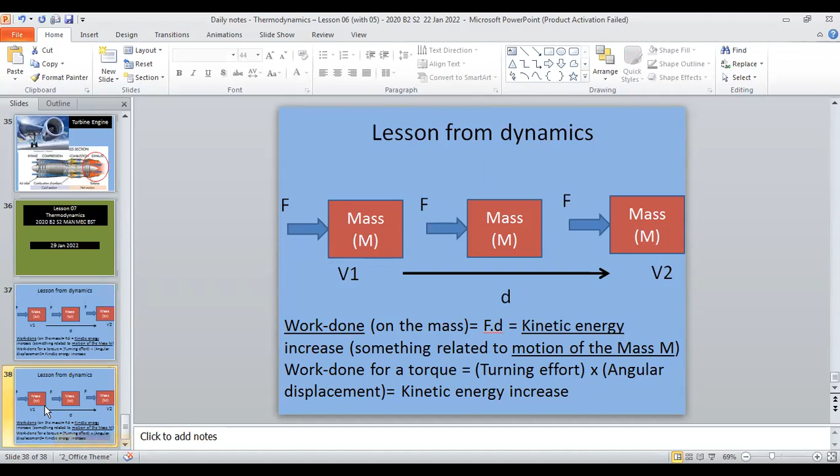So I'm starting from a previous slide here. But I'm looking in a different way. So here work done on the mass, F times D. Now let's say, if we think not on the force, but on the mass, I'm rewriting this. Work received by the mass. Of course, work done, received by the mass. Think that from the mass side, work received by the mass, F times D. So the result is kinetic energy increase.

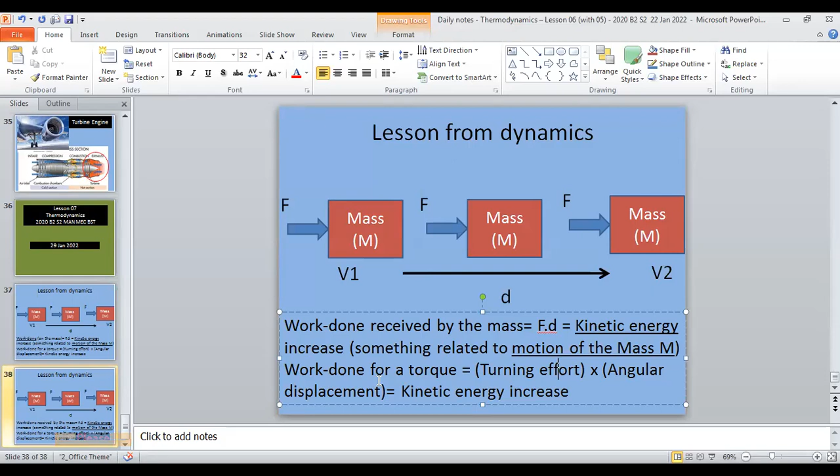So work done. When the mass receives the work done, it happens to be F times D, the force on the mass times the displacement of the mass. Of course, in dynamics, force and displacement all are vectors. This is the simplest way I'm explaining. So when mass receives a work done because of an influence of a force, the mass is displaced. Not only that, the important part is the mass receives a momentum change.

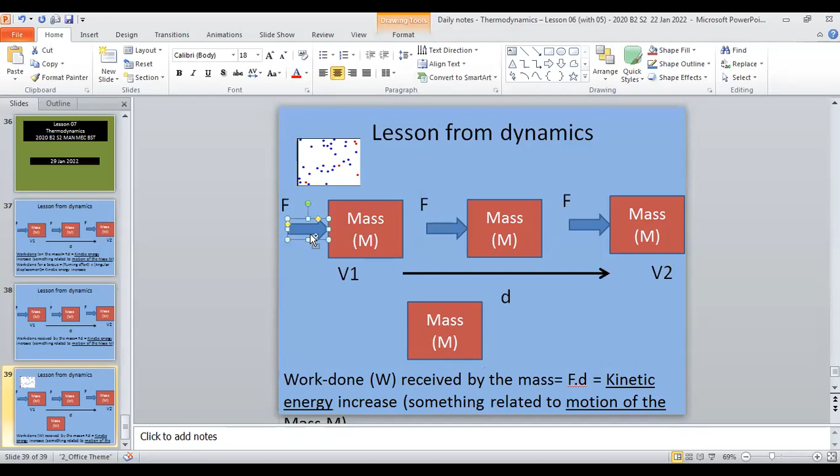Now my point is, the same way, instead of a work done received by this mass, I'm thinking of a gas quantity. Because with that force, finally, what it receives is a work. I will go for one more slide here. So this mass receives a work done, W. Force has a direction, displacement has a direction, but when it comes to work, this is receiving only. For work we don't consider a direction.

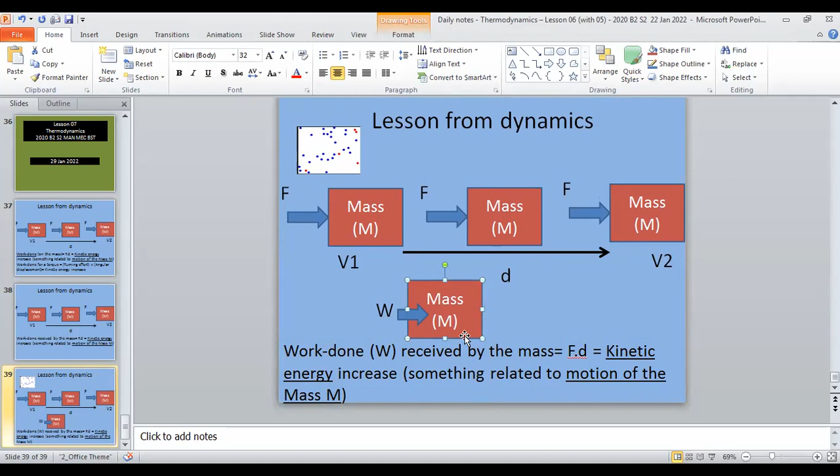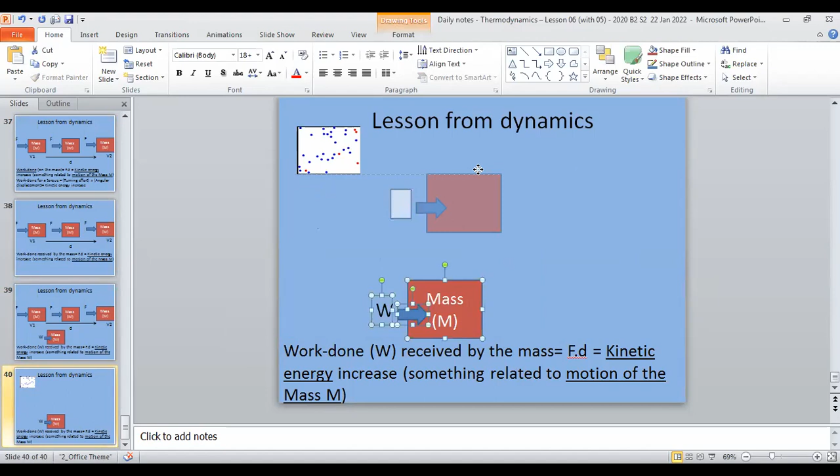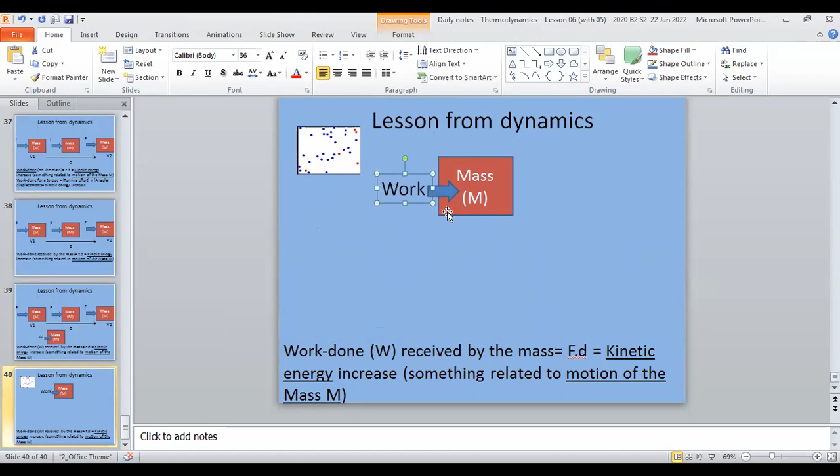I'm putting an arrow here because this work is being received by the mass. So as a result, there are a lot of changes, including displacement, increasing of velocities, change of momentum, even the kinetic energy level differences. Likewise, mass in dynamics, when it receives a work, you have a little understanding of the change on the mass. You have an idea.

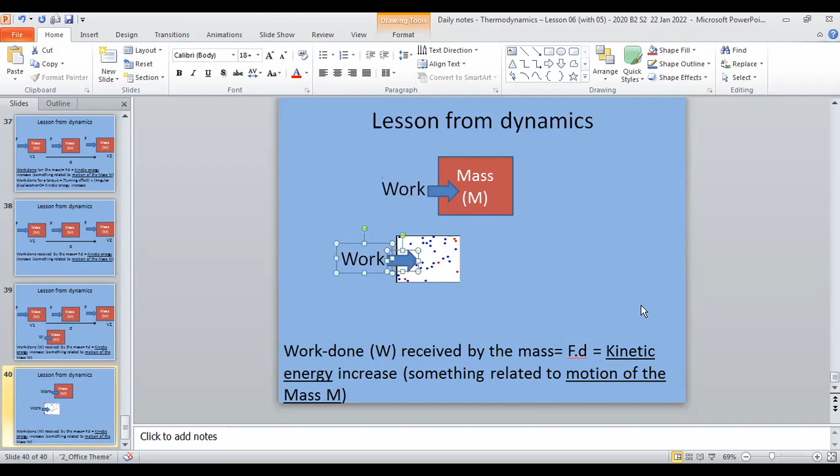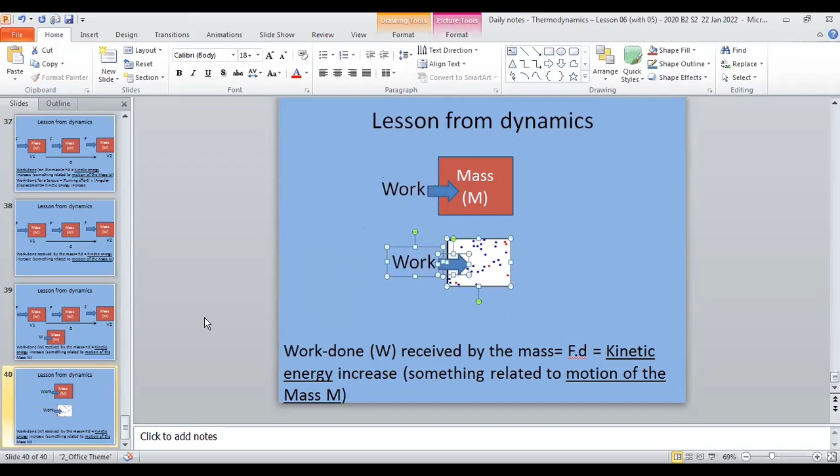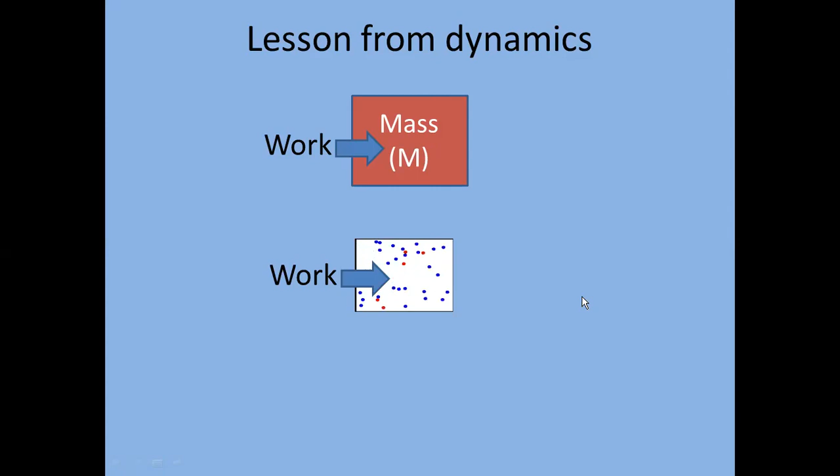When gas receives a work, a set of molecules are there, of course. When gas receives a work, as a result, what may happen? I think you know this, and we have discussed it. I'm not going to complicate your views on this, but I feel we should talk about this as well.

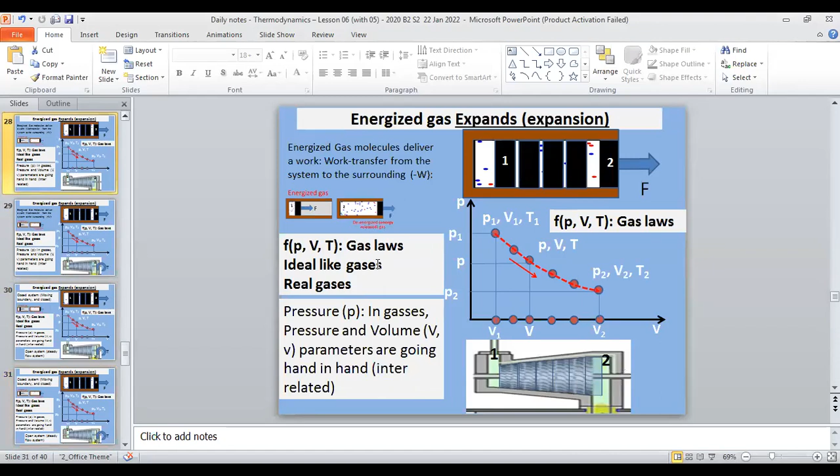So what happens is when this receives a work, it affects pressure and volume. PV changed. Pressure and volume changed when the gas entity received the work. So the PV change is the reflection of the response of this gas entity when it receives the work. The best example may be a piston cylinder mechanism. So let me take a piston cylinder mechanism.

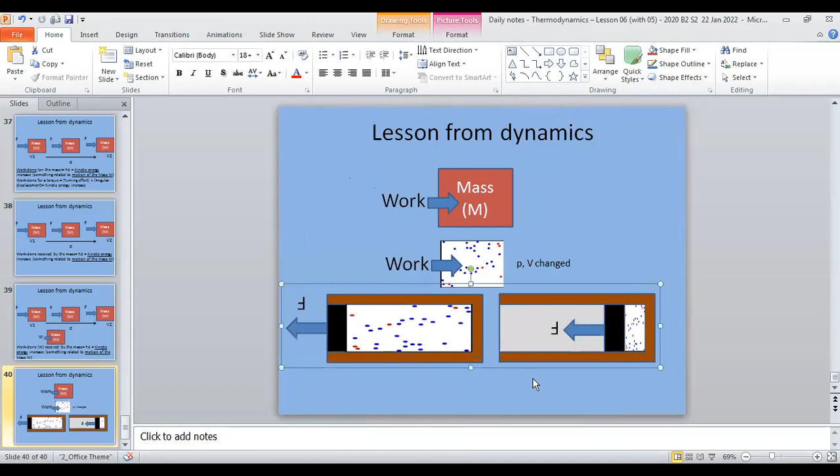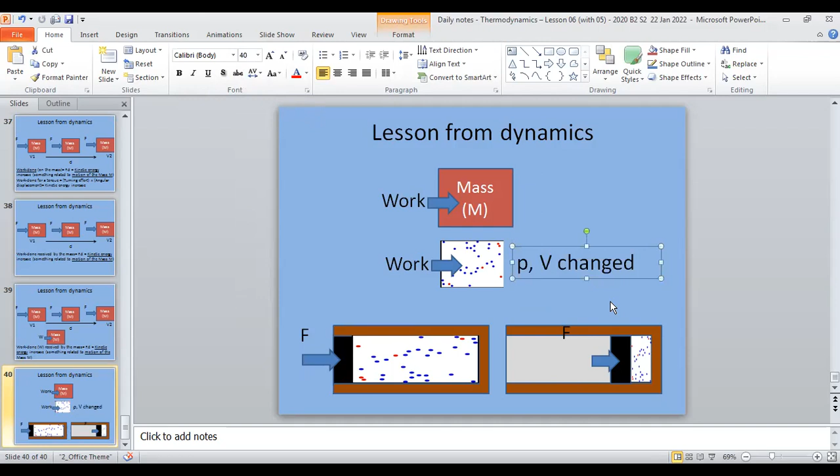Force. So instead of force, we would say this received a work. By means of applying a force on the piston, it receives a work. So this gas entity receives a work. So there is a change of P and V. Changing of PV is the possibility.

And so when force is applied, at this point, the work is fully received here. So work, put it here. Force has been applied, and there is a displacement of the piston. That's true, but this arrangement makes this work transfer to this gas or air entity. This is the work received by the gas or air entity.

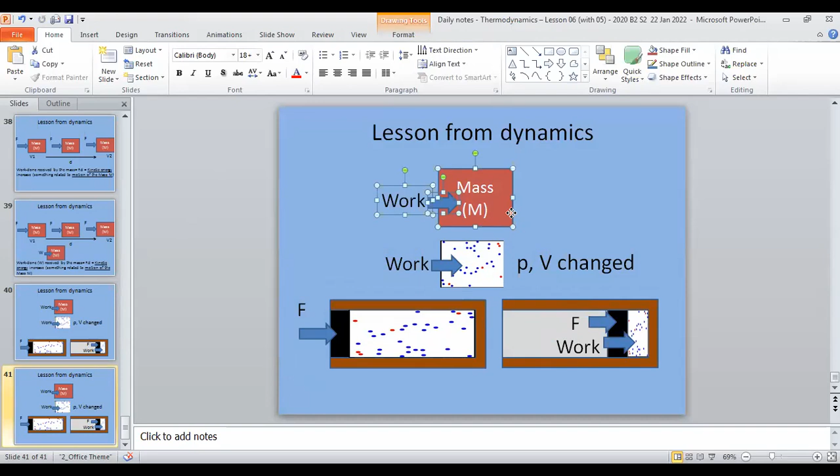So PV changed. Volume changed significantly, and even there could be pressure rising because of this work done. You can see the PV change. So when the gas delivers a work, it means it releases a work. Same thing, don't worry, but worth drilling this. Now you are thinking like a gas. Gas is receiving this.

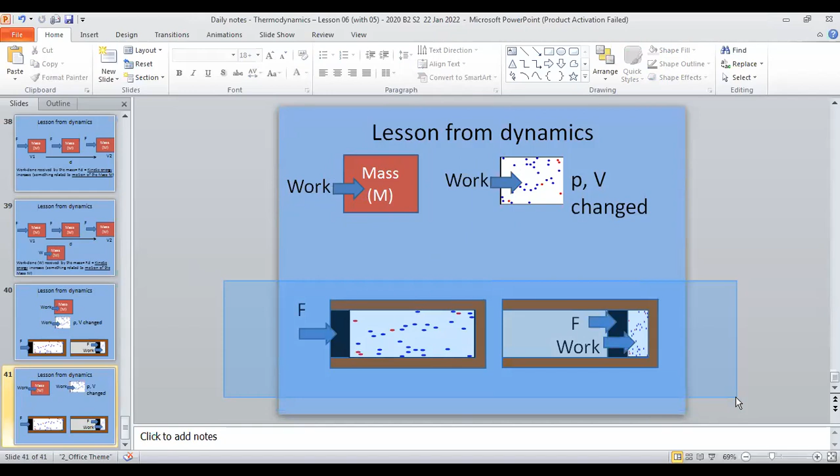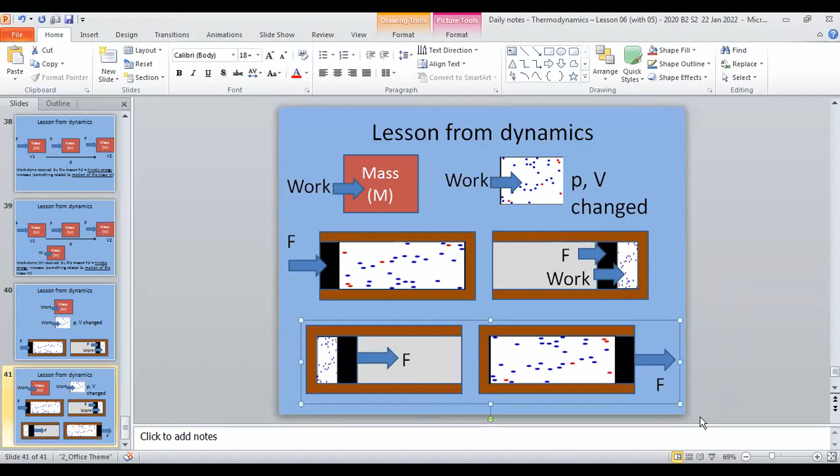Now it's different. Now it is different. Here, initially, it's pressurized in a smaller volume, but see, volume change, and because of this force, we can see the piston displaced with the force, so that this may do some work. Maybe when this pushes, there may be connecting rods and maybe cranks, so there may be some turning of flywheels, whatever, there can be a work done somehow because of this linear motion.

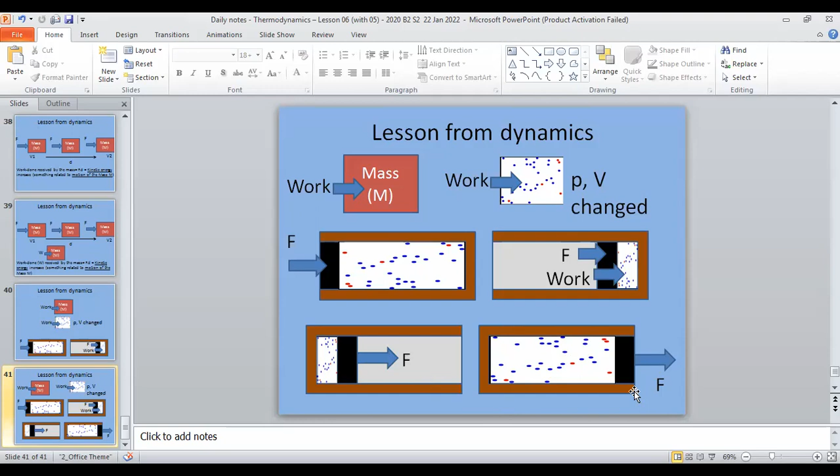So here what happens is, work. All released. Interesting. Okay. Work receiving, work releasing. Again, you can see the same. PV changed. Change of P and V. So that's a possibility. So when a gas entity is receiving a work or releasing a work, there is a change of P and V. Okay. So here releasing, here receiving.

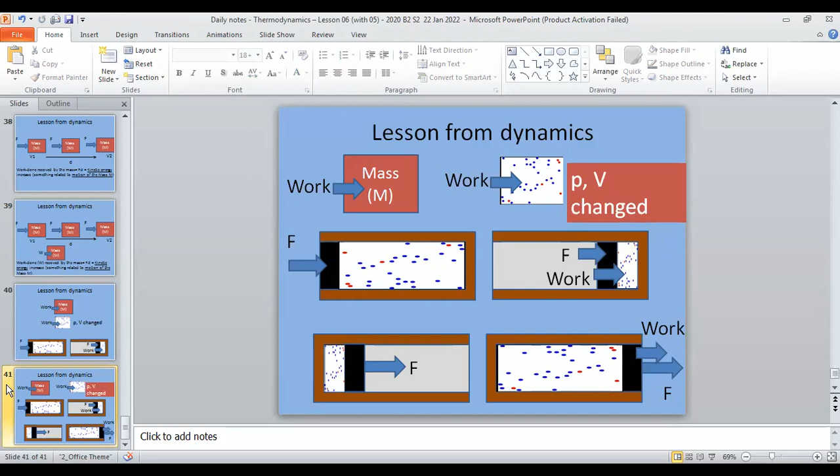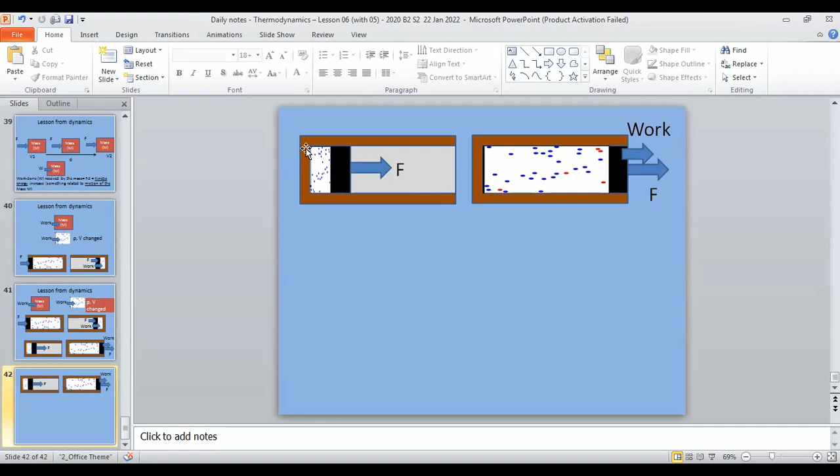Then in releasing of the work, you can see the volume increases, means the gas is expanding, we call it expansion. Prasarani in Sinhala we call it. Somehow there is an expansion of gas. So volume increase or expansion of gas entity is what we are observing when the gas entity performs work. It's quite simple.

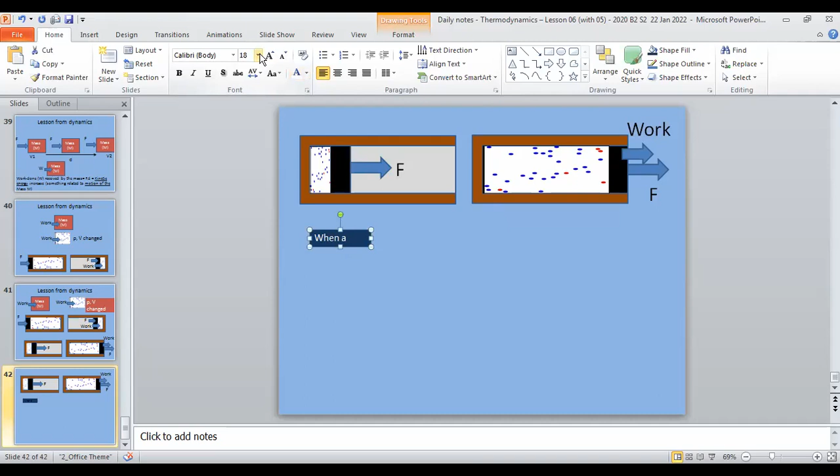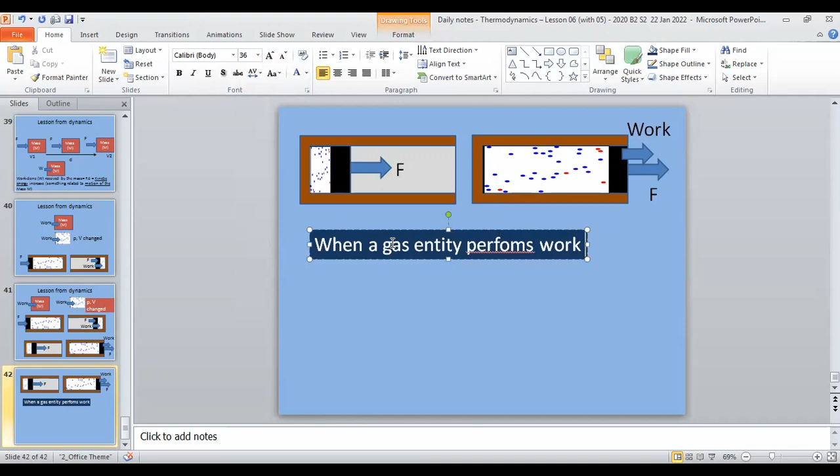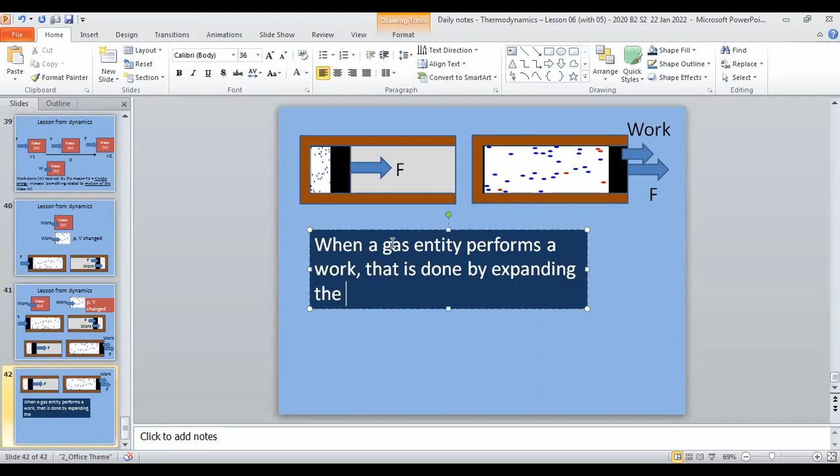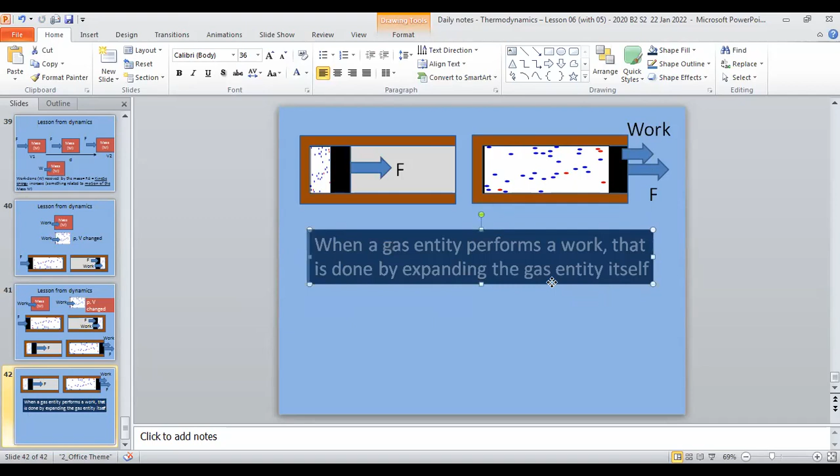When a gas entity performs work, that is done by expanding the gas entity itself. Okay. So gas entity itself expands and performs a work. Performs a work means delivers. Delivers or releases a work. Delivers is the best, or performs.

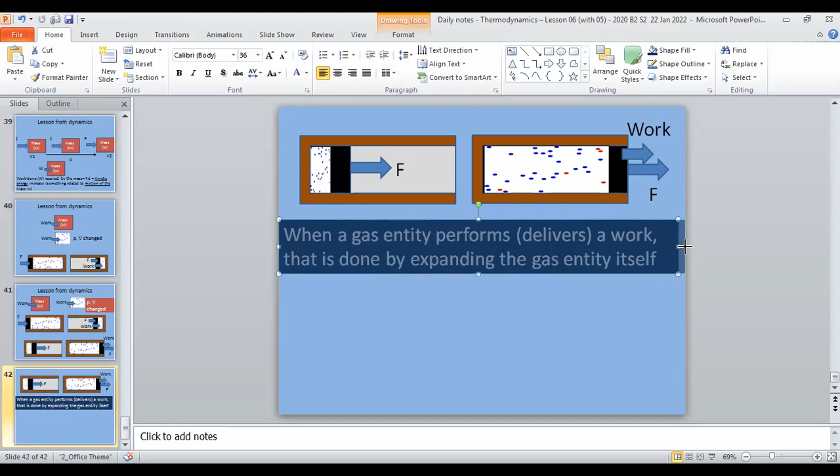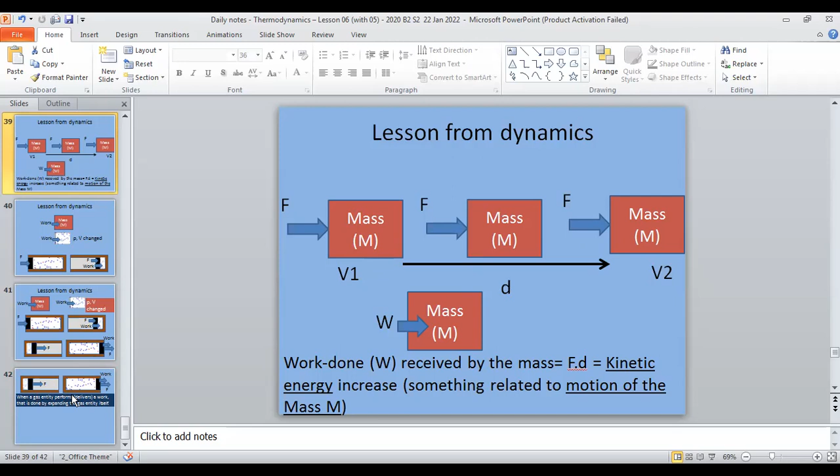Volume expands. Okay, so this is the obvious one. So you imagine the volume increase, but here when it receives, it is displaced. Still connected with the space, receives a work, but somehow here is displaced when it receives work. So we will come to receiving work afterward.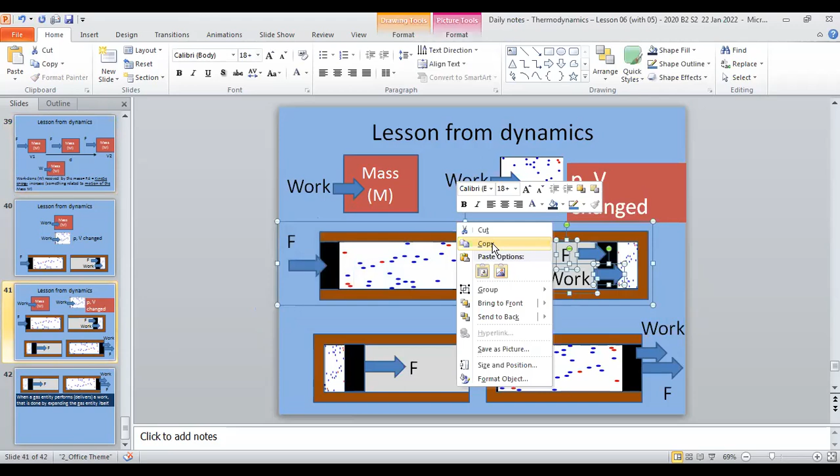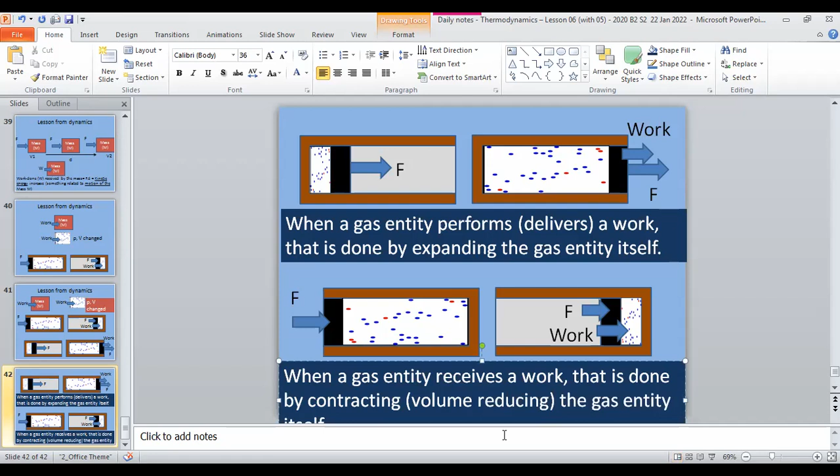Now see, when a gas entity receives a work, that is done by contracting, means volume reducing, contracting, or the volume shrinking. Let's say in general, because that's how they are receiving a work. So there is this contracting effect somehow. Interesting, eh?

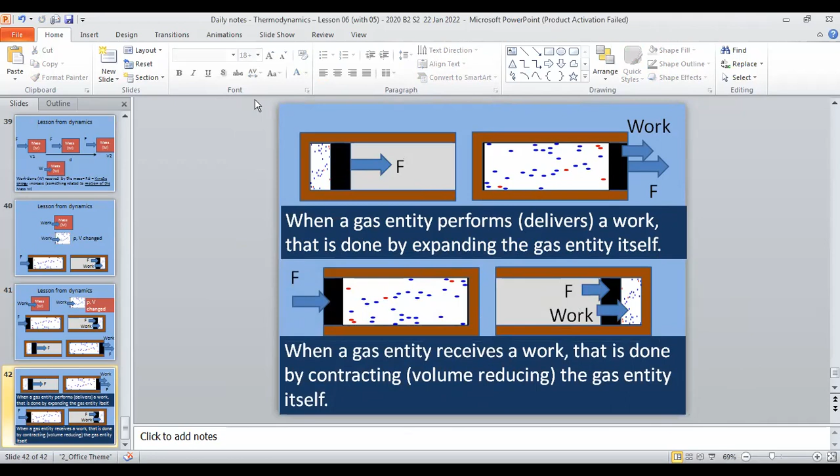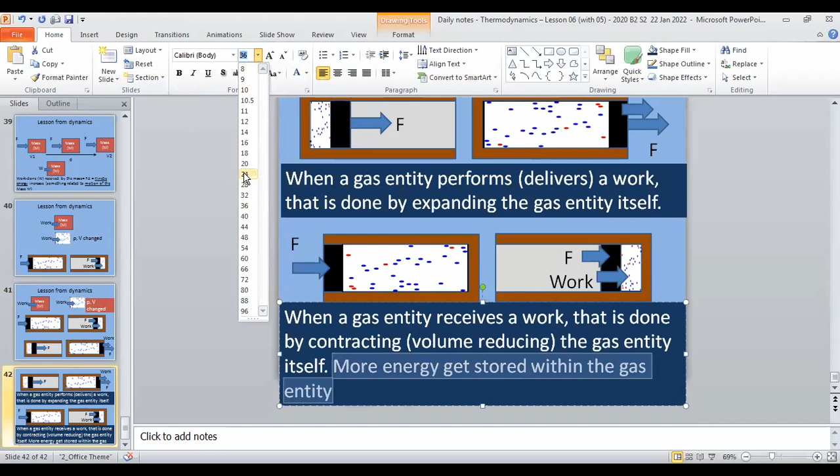So here, when it contracts, receiving work means more energy gets stored. More energy gets stored means energy level increases within the gas entity. Yes, this is what happens. More energy gets stored because it's a kind of energy input. It receives, so more energy gets stored because it has to be there if it received.

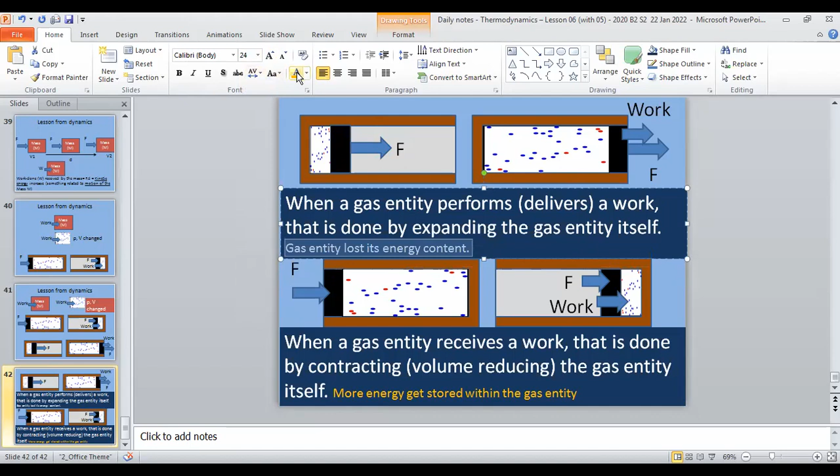And here, when this gas entity delivers a work, now the gas entity has reduced energy. It has lost its energy content. Not fully, somewhat lost, I would say equivalent to W. Here also equivalent to W.

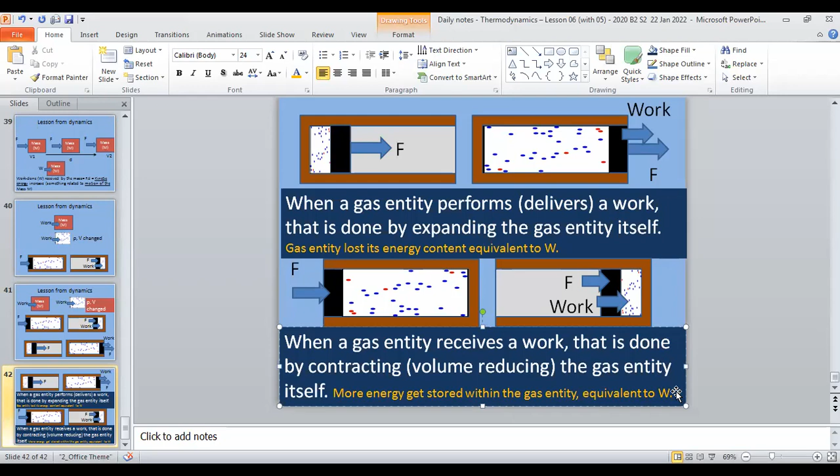Let's say no other heat interactions. So I put a question mark here. For some cases, if there are heat losses, it's a different case. So W received, correspondingly there is an energy rise. If heat is lost, there is a corresponding energy loss. It's a different story, but corresponding to W there is an energy rise. Delivery, there is an energy loss equivalent to W. I believe you can digest this easily.

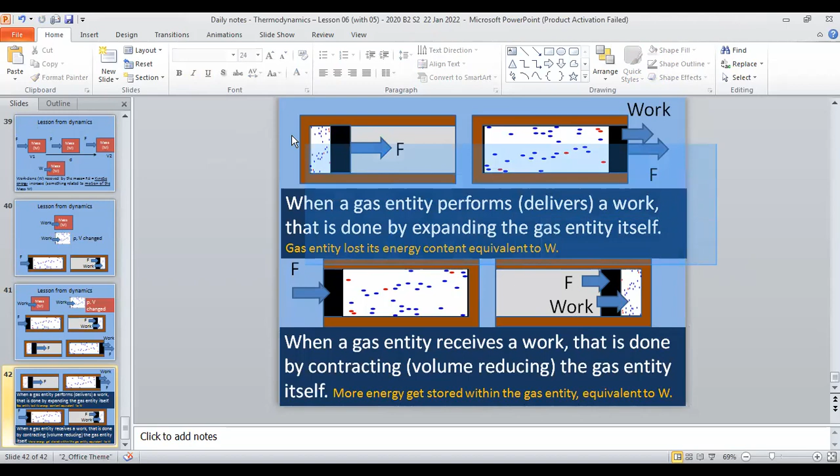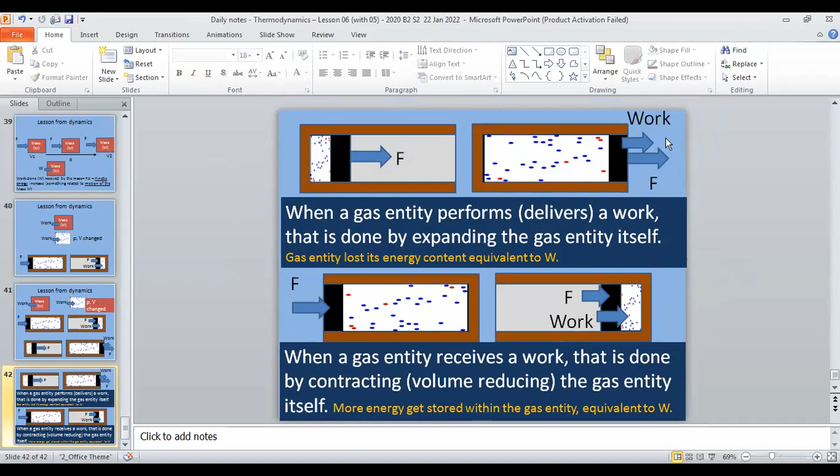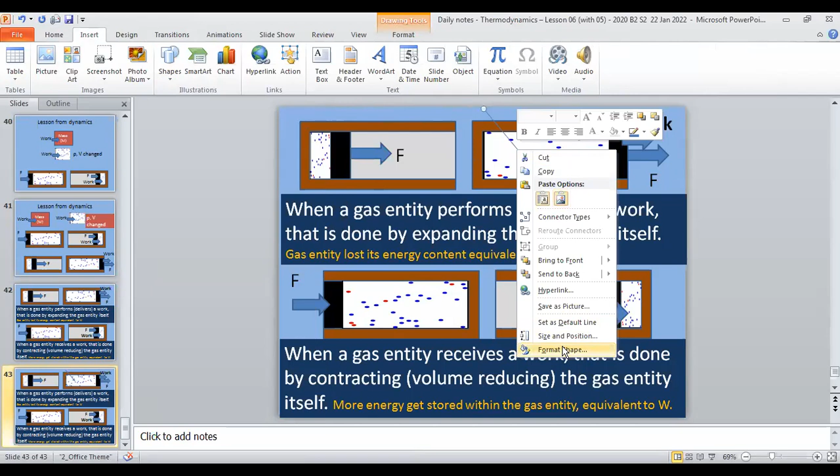Now, I'm taking the same. Let's say sometimes, while receiving this work, there can be gaining or losing of heat. See, receiving some energy in this expansion process, heat. Let's see, now what happens?

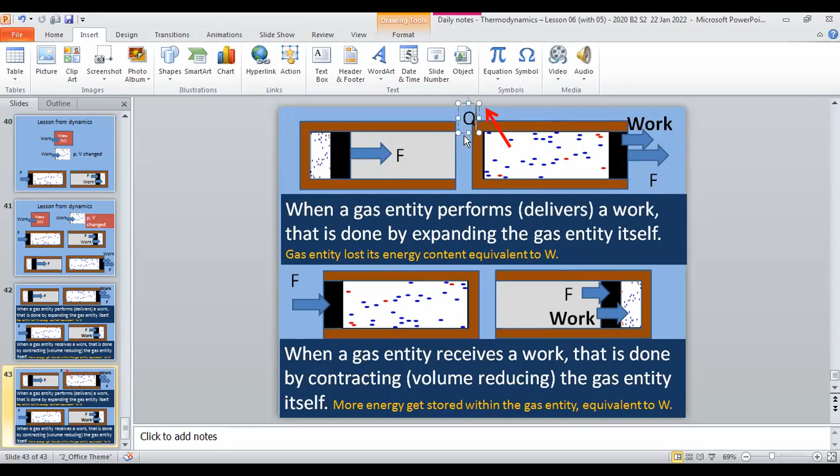Sometimes there can be receiving of energy. Sometimes there can be losing of energy. If you think of losing, mostly in engines, the engine is very hot, releasing energy to the outside as cooling the engine. So, lost heat. I mark this heat loss. It's a kind of energy loss, Q. So this is heat.

Now it's a different story. See both heat and work interactions. So it lost its energy content equivalent to W, and also there is another portion of energy content lost equivalent to,

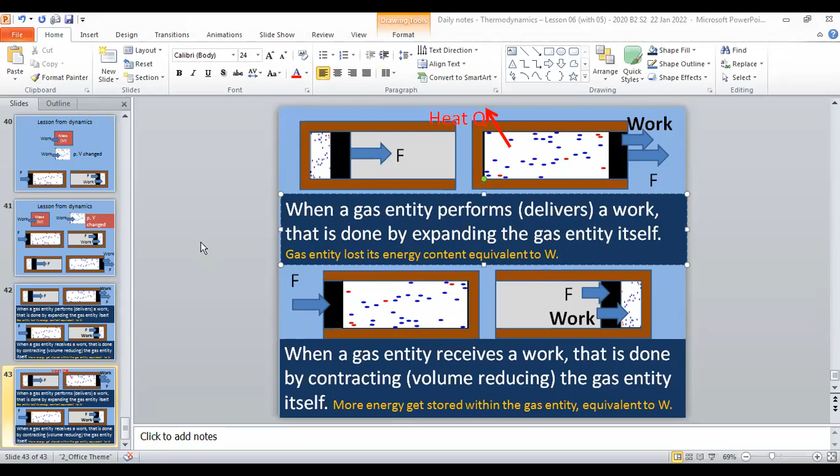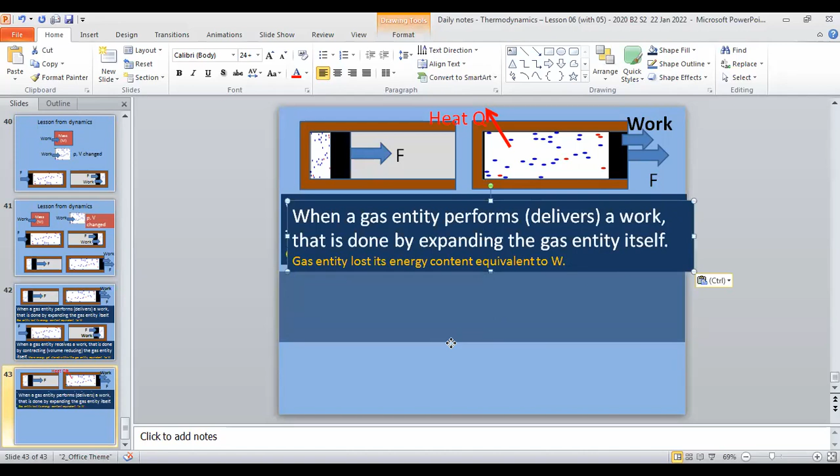Give me a second, Bhutai. Now, I think I will do this way. Sorry, Bhutai, there is a little disturbing.

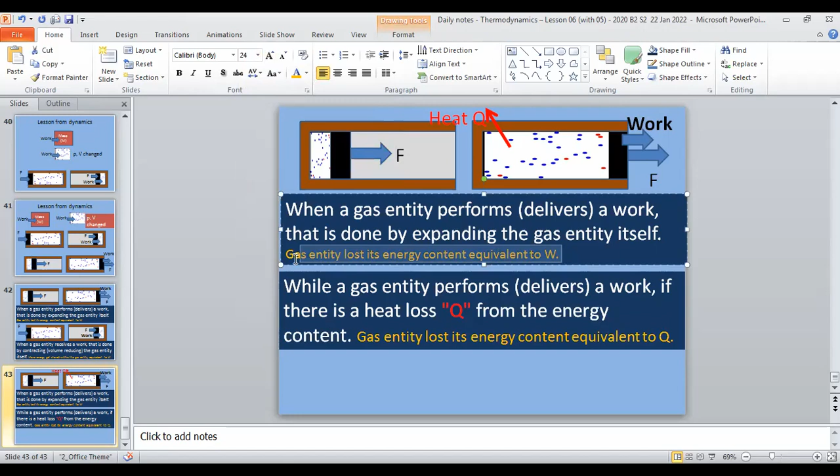Now, gas lost energy for work equivalent to W, and also lost energy because of the heat loss equivalent to Q. So two energy losses. Okay. So if originally the energy content is E1, and later becomes the energy content E2,

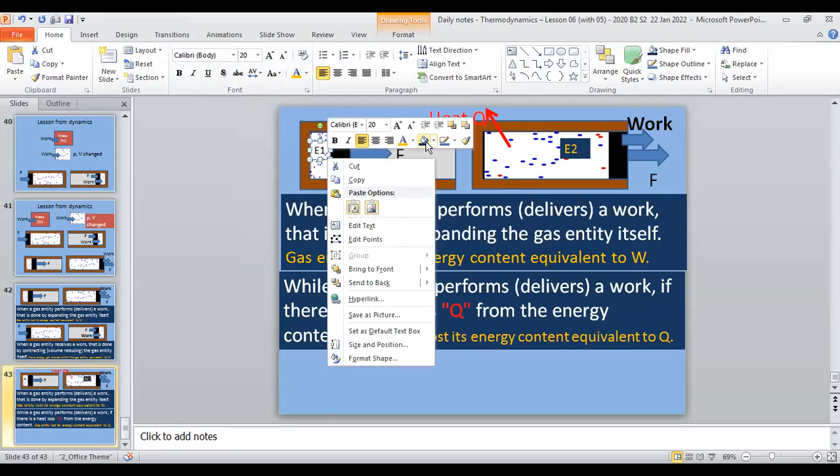then we can write an energy balance. Writing an energy balance: originally, it has E1. Lost W for work delivery. Lost some more for heat loss or releasing. And what finally remains is E2. Same like balancing money, same like balancing materials. You can write energy balance like this.

Why can we write energy balance? Because, same like balancing money, energy cannot be lost. It should be somewhere else. Also, energy cannot be created. If created, there could be more energy; no such thing. Energy cannot be lost, and also energy cannot be created. We call this the conservation of energy principle, or the first law of thermodynamics. So that is the reason why we can write energy balance.

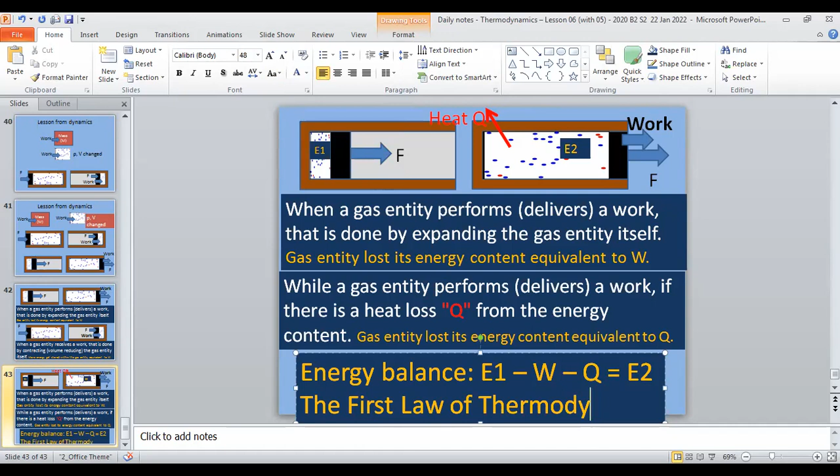So this is because of the first law of thermodynamics. According to this first law, we can write this. So how to know the first law? You read your one-time note, you can have a better understanding. So this is just an expression. The engine's power stroke, you can have this. So this is the first law we are writing for a closed system.

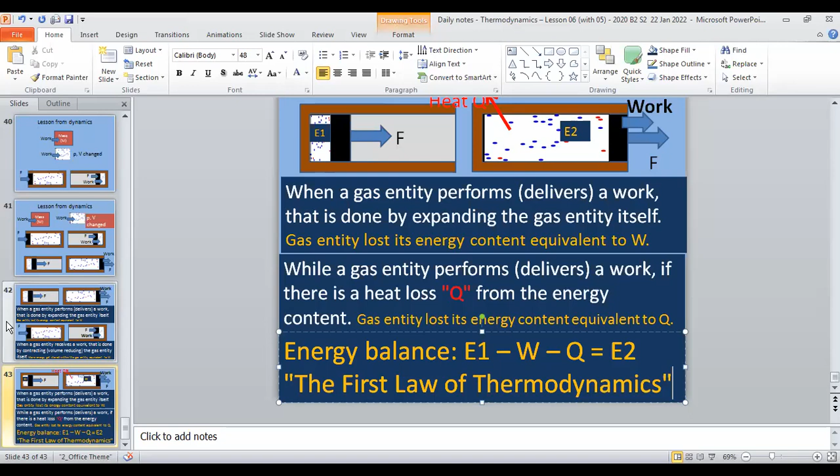Initially, there is an energy content. And because of losing energy through work done and heat release, what finally remains is the initial energy content minus the heat and work, because heat and work are also forms of energy in transition. The initial energy, heat and work all have the same energy units. I believe you can understand this.

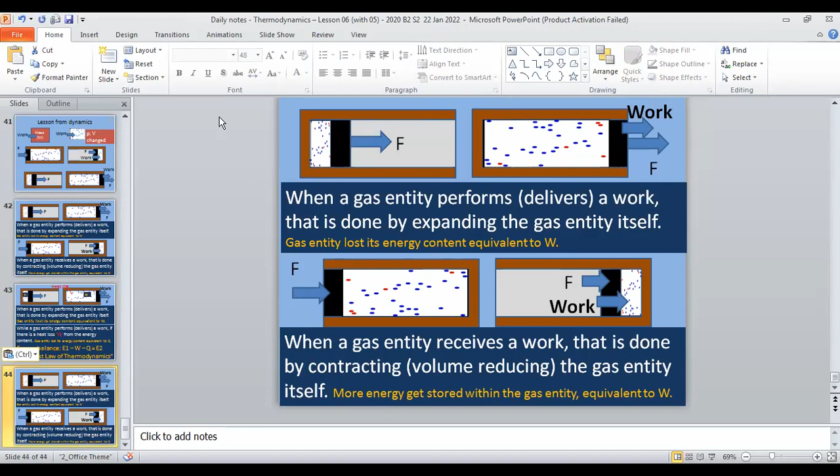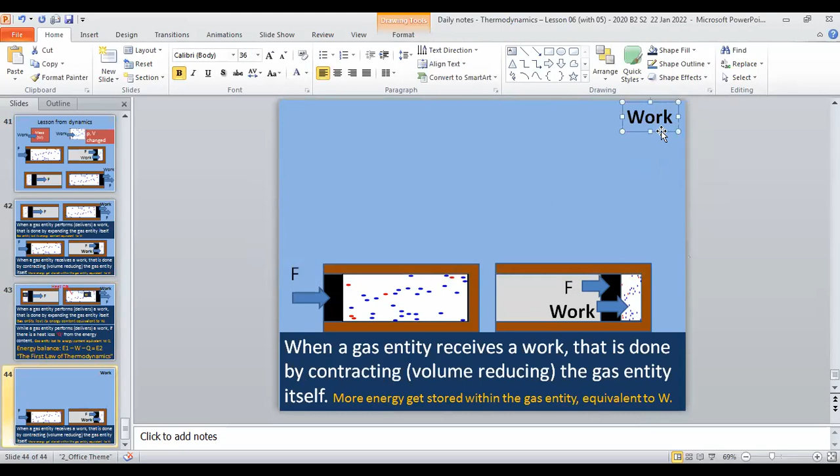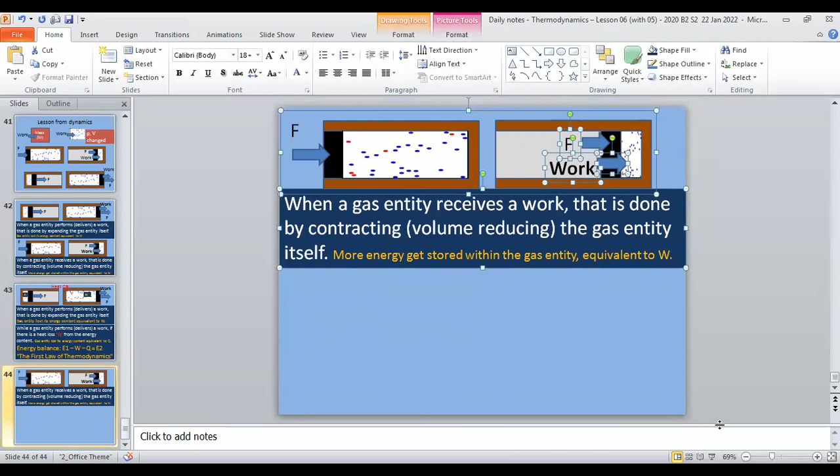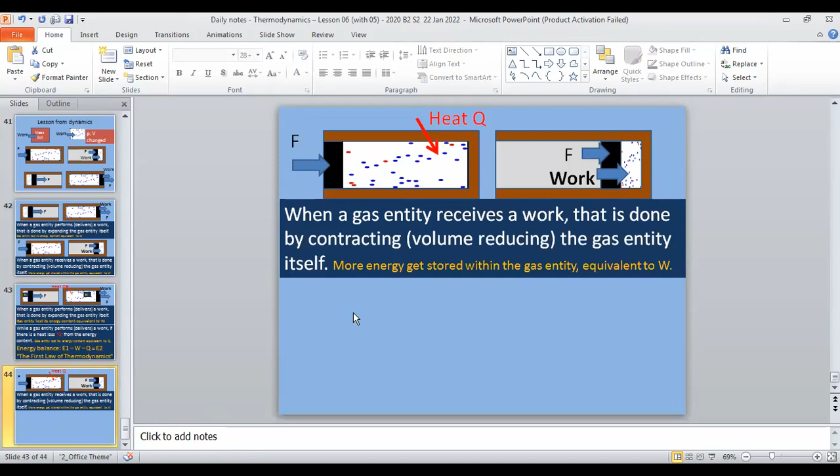So if this receives energy and work, let's see. Same way. Now it receives work, W, so I change the arrow. While the gas entity receives the work, if there is a heat gain, let's say, I put gain Q into the gas entity, heat gain Q.

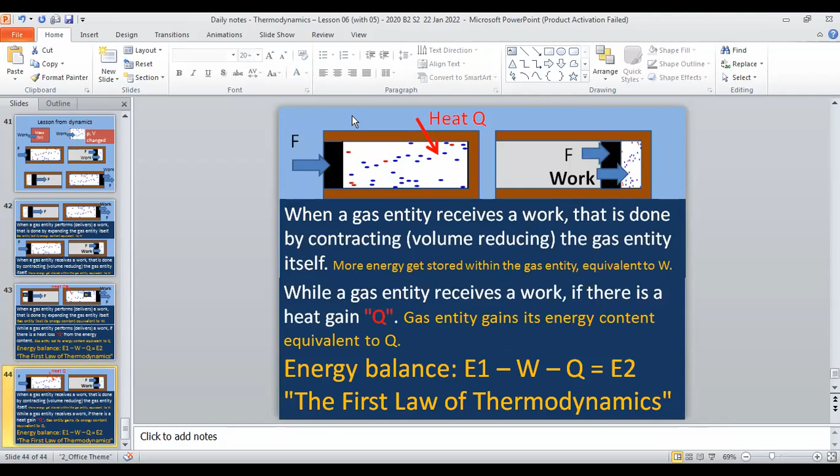So the gas entity gains energy content equivalent to Q. Now this is the story. Now you can write the energy balance. I take E1 and E2. Now you can see E1 receives some work and also receives some heat energy, thermal energy, and finally is more energized, reflecting the first law of thermodynamics.

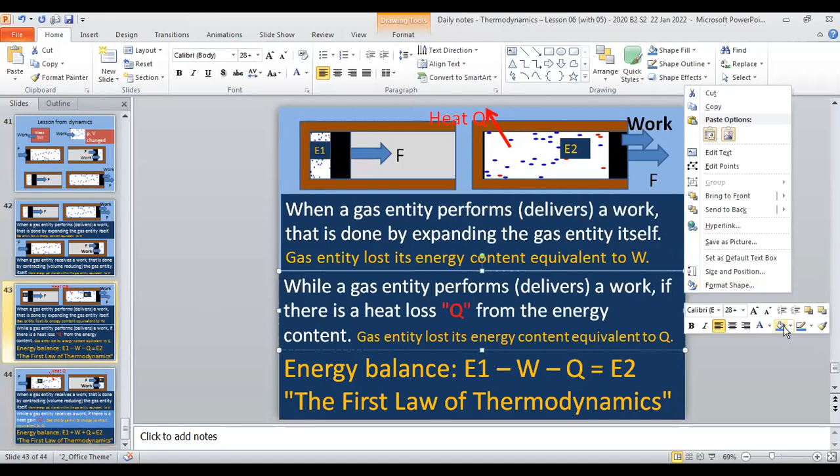This is very important. You feel this is very simple, but remember this is very important, and you should feel this rather than remember it. So again, energy balance, and this is a closed system. This boundary is moving, because finally it's shrunk. Only one side is fixed; the boundary is changing. So this is a moving boundary, but a closed system: no mass goes out, for this process of receiving heat and work, in the compression stroke.

So the flywheel effect moves the piston inwards, but the cylinder is hot. So this sucked air, once being compressed, may be receiving some little heat portion from outside.

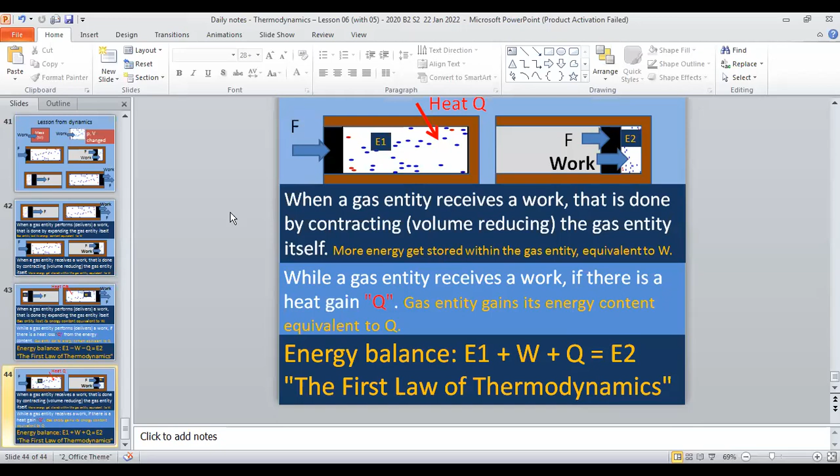The third one, I'm writing this way. As a standard, the direction towards the system, the gas entity, is the positive direction for heat receiving. Direction towards the system is the positive direction for work receiving. So this is for positive receiving of heat and energy. This is the energy balance: E1 plus W plus Q. Later you can learn more on this.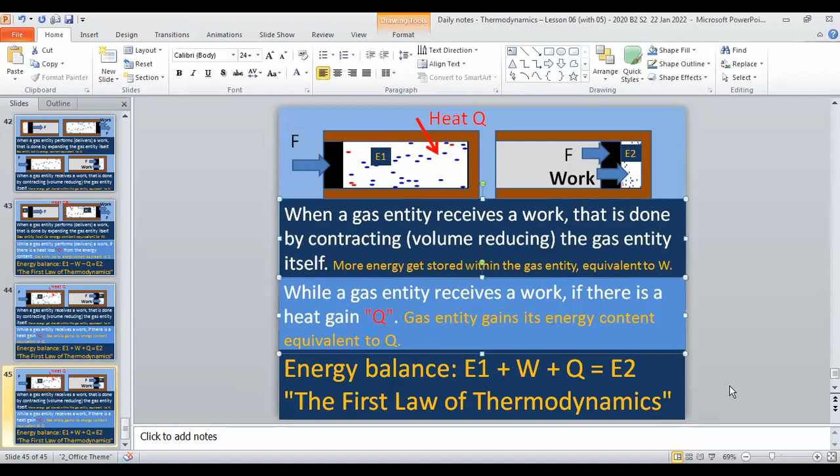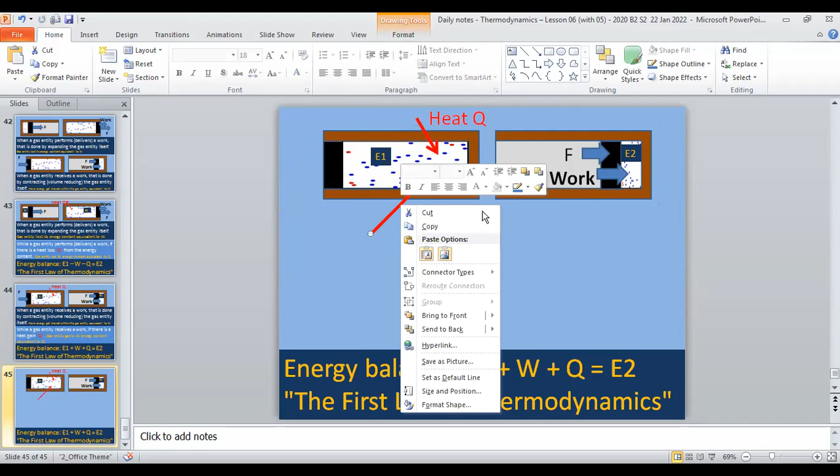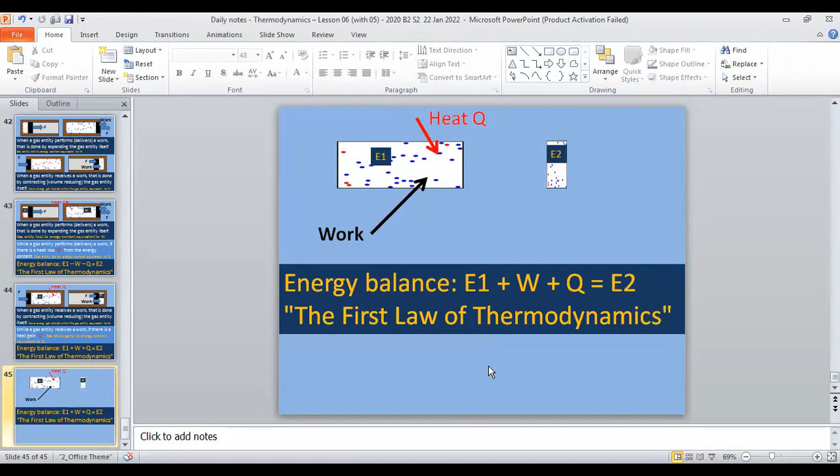So now you know this. I will take only this one. This receives heat, and this receives work, and finally results in this different state of the gas entity. That's the energy balance, because only looking at the working fluid is enough. The initial state before receiving heat and work, and the final state here.

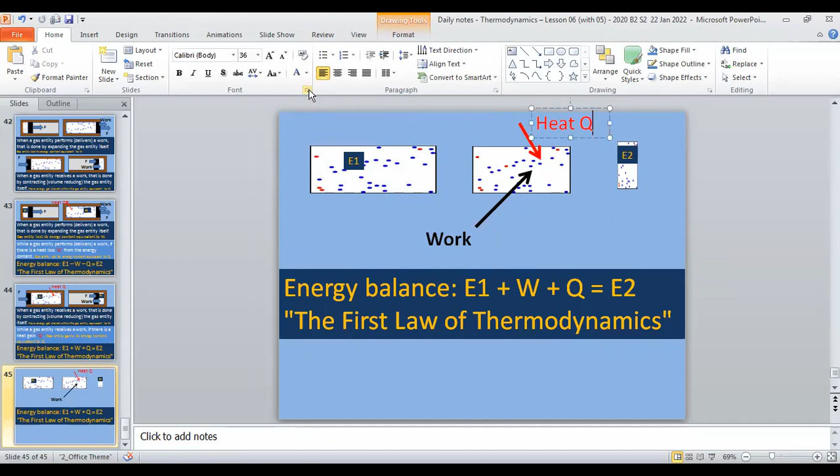To make this a little better, I'll do the initial state like this. This is an intermediate state taking place during the process. I put here Q, Q1 to 2.